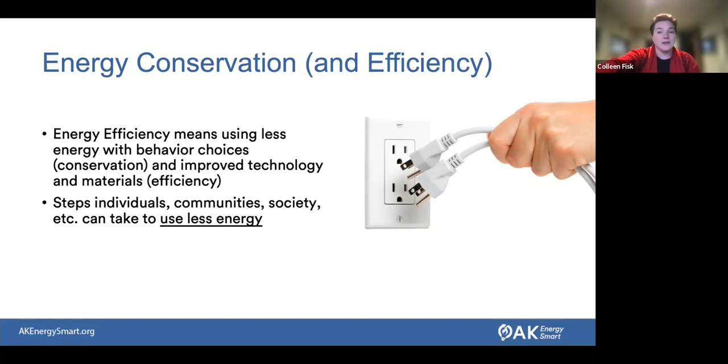And there's a lot of benefits to that, right? We can save money on our utility bills, but we can also save a lot of our resources - we have limited resources. A lot of our electricity comes from natural gas, which is projected by the state to have a shortfall by 2027. So there's a lot of resources that we can use more efficiently and conserve and save. And of course, our lowest carbon fuel is efficiency - anything that we don't have to use is going to be our cheapest and lowest carbon fuel.

Even solar panels and wind turbines and our renewable energy resources - they have much less impact, but they still have some impact from where those materials come from. So any less energy that you can use, the less impact that you're going to have. We are going to focus a lot on what those cost savings are, but I just want to keep that in mind as we're thinking about these things that we can do to save energy.

So one of the things - even if you leave now and head home and say, okay thanks Colleen, that's great, I've heard enough - if nothing else, I want you to check out these energy saving tips resources. This is a booklet published by AHFC and Alaska Energy Authority that has zero cost to expensive upgrades and talks about what those energy saving tips can be.

It's really Alaska specific, and you can download it for free off of our website, which is linked here, or AHFC's website also has it. At the very back of this version of the book, there's an energy assessment checklist. That checklist has a way for you to do a quick assessment of what you know about your house, and a couple of things you can check in your house, giving you a really good starting point for thinking about your energy.

A version of that checklist is also on the AK Energy Smart website. That website has a lot of free lesson plans for teachers to use for K through 12, but it also has a growing amount of adult education resources like this energy assessment checklist that you can use. So if nothing else, I encourage you to check out that energy saving tips book, especially if you have to leave early today, because that's a great resource for understanding what's going on and getting you started on this.

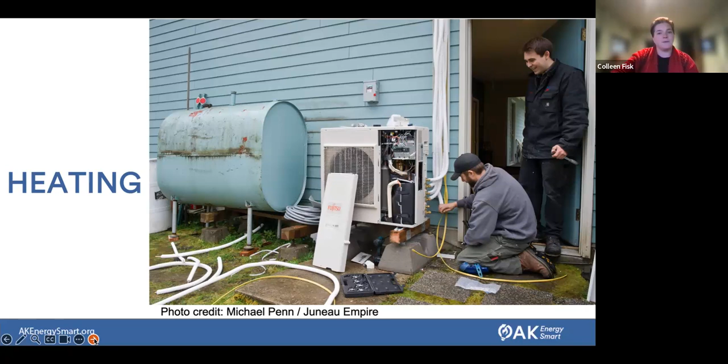So I'm going to jump in. I want to make sure we have time at the end for questions and that we aren't going too crazy here. The first thing is heating. Our biggest energy use as Alaskans is on heating. That is our biggest cost and our biggest resource use.

This AHFC housing needs assessment is from 2018. I haven't seen another one yet, but they have one coming out soon. From 2018, you can see that space heating, no matter what region you are in, is your largest household energy cost by region. So if you're thinking about weatherization and energy savings, this is going to be the biggest bang for your buck. I'm also going to talk about water heating and appliances today, but space heating is by far the biggest impact you can have for saving energy.

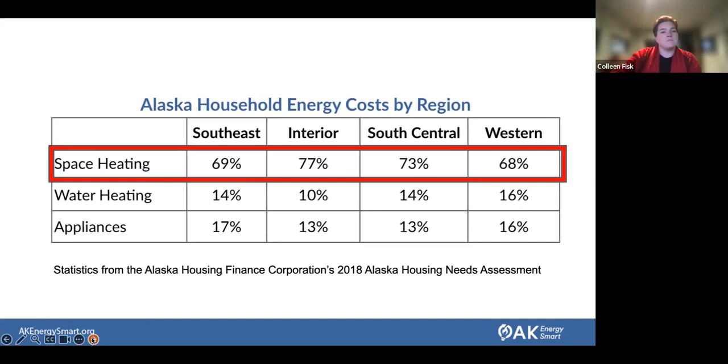So what can you do? You can do some really simple things like checking and unblocking your air vents, radiators, and registers, making sure these aren't blocked, because if you have better airflow, then that heat is going to be able to actually move evenly throughout your house.

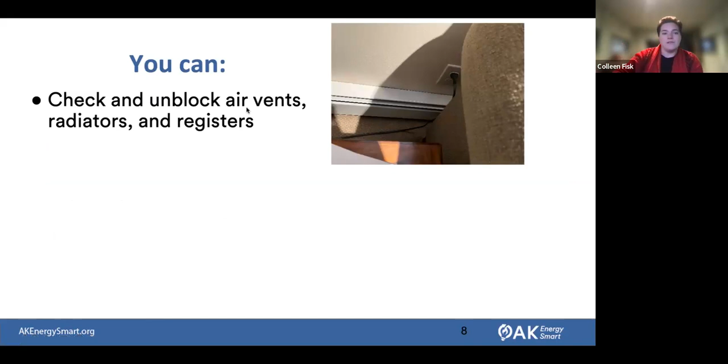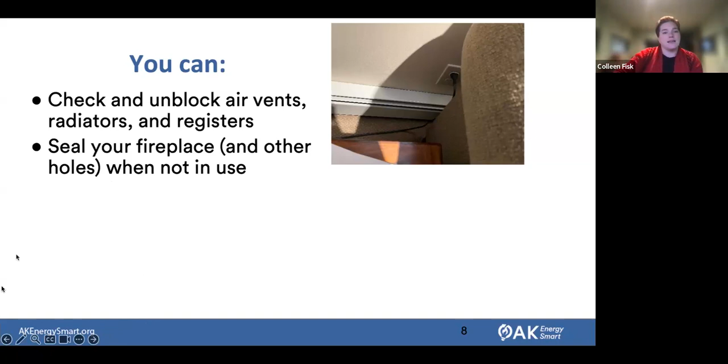You can make sure that your fireplace is sealed, so make sure that flue is shut whenever it's not in use, or block other holes that aren't needed anymore. It's very important, of course, to not block anything that is supposed to be providing ventilation as part of a heating system. That is something that I've heard happens with unfortunate frequency. So don't just block any old hole, but anything that's not being used for proper ventilation, you can consider blocking to see if those are big energy heat loss areas.

It's also really important to have a professional tune your heating system. It's recommended that it's checked every year, and generally systems older than 15 years will have a really big payback by being able to replace them completely. And of course, there are some much more efficient systems, and also things like heat pumps that are coming, where the technology has really improved.

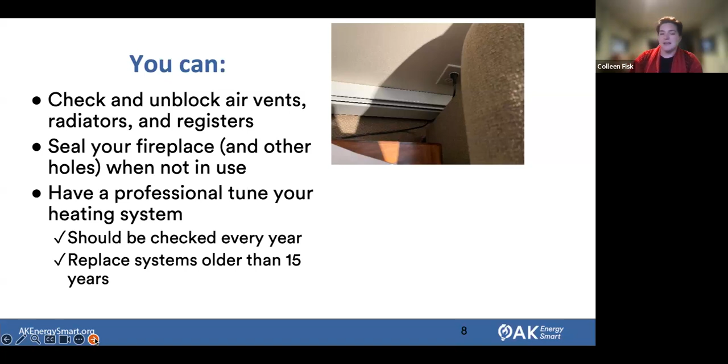So here's a fun photo. Make sure you guys are paying attention. Keep your bunnies off of your vents. I see at least one veterinarian on this call, so you never know what kind of animals are out there.

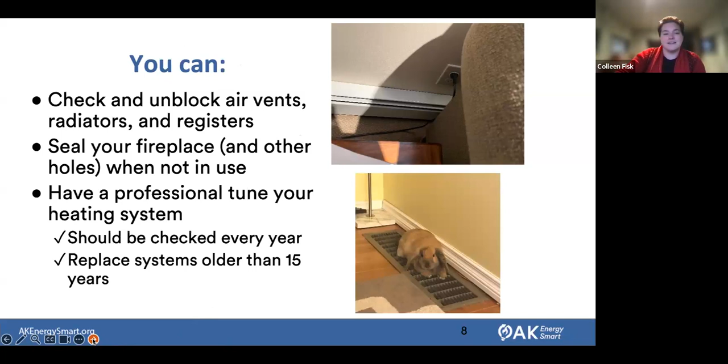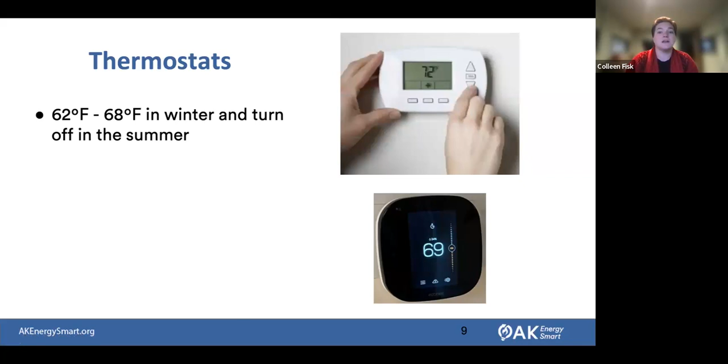Also related to heating, one of the biggest money savers is if you don't already have a programmable thermostat, definitely get one and use it. Have that heat turned down as low as is comfortable for you and those in your house, and have it even lower at night or when you're not at home. Because for every degree that you lower it, you can save 2% on your heating bill. It's a really huge savings by being able to reduce that temperature.

If you have a programmable thermostat, you can set it back 2 hours before bed, so it'll just slowly decrease the temperature, then increase just before you wake. Whenever anybody's not home, use those vacation settings too. If you have a smart thermostat, turning it down when you're going to be gone for a longer period of time can really save a lot of money.

Of course, you want to make sure things are staying safe. Most people don't turn it down below 60 or 55 degrees in the wintertime, so that you can make sure it stays at a temperature where your things aren't going to freeze or cause problems. But whatever is safe and comfortable for you, the more that you can do, the more savings that you're going to have.

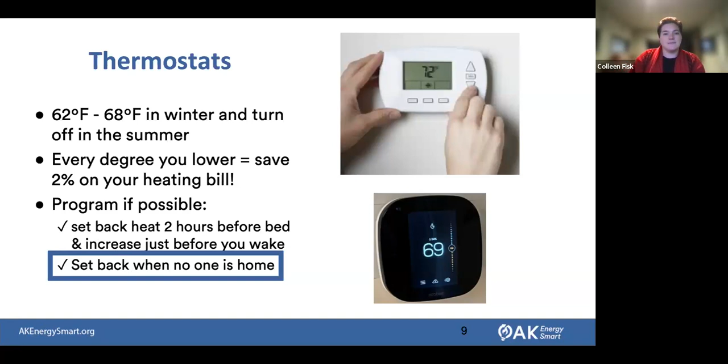So those are the big things on heating. And related to heating is insulation and air sealing.

What's really interesting here is that with the new federal incentives for costs, we currently this year can get up to $1,200 for tax incentives for purchase costs of insulation and air sealing. I'll talk about that a little bit more, but I wanted to get you guys thinking about that, as there are incentives for doing these things as well. So if it costs money to buy things to do the upgrades, there are some tax incentives already available for us to use.

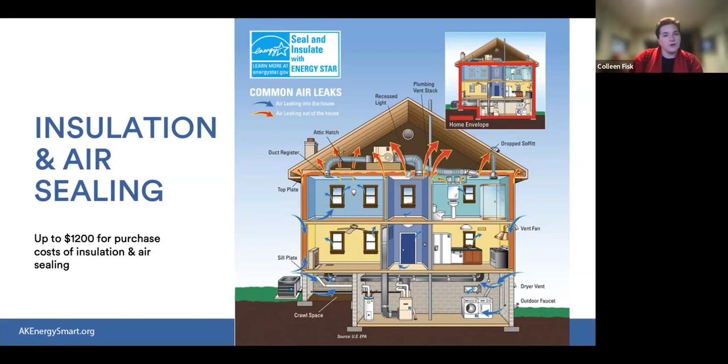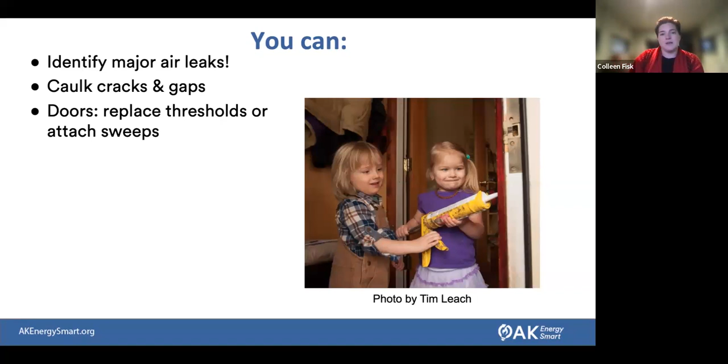When you identify those, you can do things like caulking for those cracks and gaps to be able to save that energy. You can replace thresholds or attach sweeps on doors, or any weather stripping, especially on exterior doors, to improve their energy efficiency.

With windows, a lot of times people think they need to replace them, but you can actually do a lot of repairing and improving the insulation yourself by adding caulking around the window. Unless you have single pane windows in your house, generally it's more cost effective to repair and improve the insulation, or even use things like plastic window coverings you can get at stores to add a little extra layer of efficiency there with windows.

Another tip I heard was to make sure windows are fully closed and latched. I just did this recently - I went around all the windows I normally open in the summertime and relatched them so that it improves the seal on that window and reduces heat loss.

If you do get recommended to do new windows, or if you have single pane windows, there are incentives for up to $600 for new windows, and that's every year. I think it's $300 per window, up to $600. So if you do 2 windows this year and 2 windows next year, you can get $600 twice for those 2 different tax years.

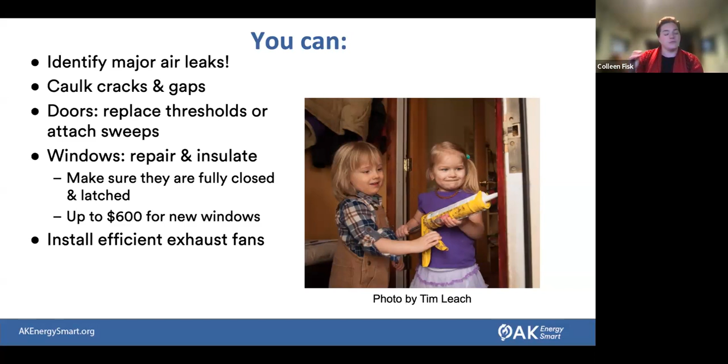There's also efficient exhaust fans. If you're doing a lot of sealing and you don't have good airflow in your house because of that, you want to make sure you're not creating issues for mold. If you're not having enough airflow or other poor air quality, you can install really efficient exhaust fans that you can replace like in your bathroom - just make sure you run them - and they're really quiet and much more efficient than older exhaust fans that are out there.

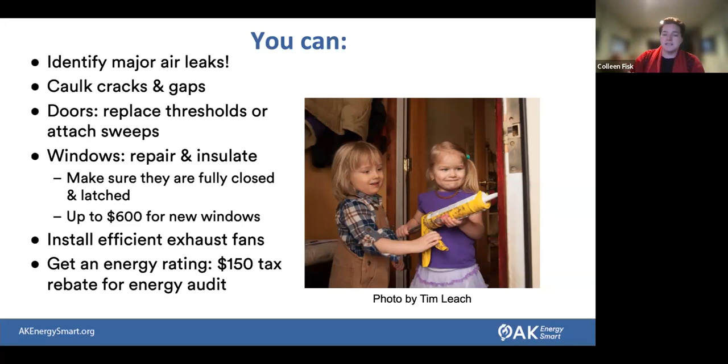The biggest thing is getting an energy rating or audit. Energy audit is kind of the overall term, and there are energy raters that Alaska Housing Finance Corporation certifies. You can get up to $150 tax rebate starting this year for any energy audit that you pay for. That will really give you those specific recommendations for what would save you the most money.

For those energy raters or auditors, they can do things like estimate existing insulation R values, inspect vapor barriers, evaluate attic and foundation insulation, and then provide recommendations for what makes the most sense for your house to save energy. AHFC has this rater list to be able to look at that, and again, you get that $150 back.

I don't know what the going rate is. I heard one person guess at $500 for the current rate for an energy audit, so it's not cheap. However, if that's something you can do and you get that $150 back, it is a very helpful tool because they can give you that recommendation.

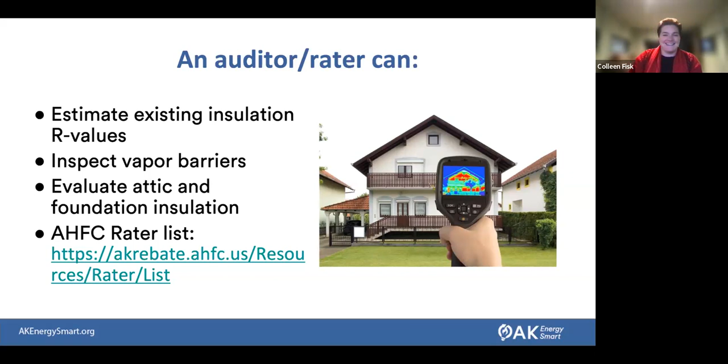All right, so for hot water, your domestic hot water, there's a few things you can do to save energy. We have our heating as our number one - we've talked about heating systems and insulation and air sealing. But now our next big energy cost in our homes is hot water.

So again, turn down the heat. In this case, it's really important to make sure the temperature is staying safe. You do not want to go below 120 degrees Fahrenheit, but often hot water heaters are set to a higher setting than they need to be, like that 140 degree mark. Turning it down to 120 can save 6 to 10% on your energy bill.

You can also check to make sure your water is staying at 120 degrees by running your faucet for a couple minutes and using a thermometer to see, okay, it's actually staying at 120 degrees. So if you're concerned about that, you can check it that way. It can be another big energy saver related to heating.

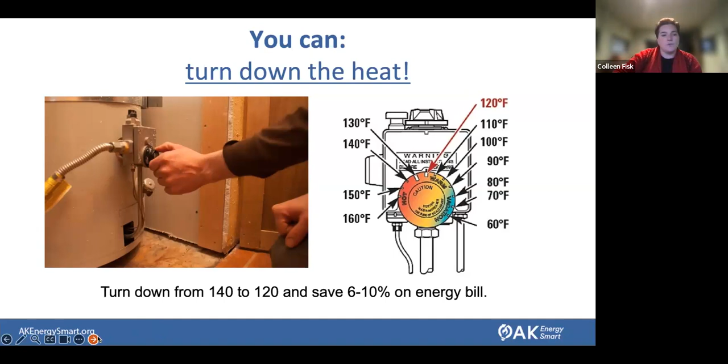And other things you can do related to water is, of course, don't let the water run, especially if it's warm water. Fixing leaky faucets and running toilets - these are things I like, when I bought my house I had to learn how to fix a running toilet, and it was easier than I thought. YouTube is a wonderful thing to be able to teach you things, right?

And doing things like low flow shower heads and having aerators on faucets can really help you save.

And if it's recommended by the manufacturer, some of the older water heaters, you can even add a blanket to them for insulation. If they weren't built with really good insulation in mind, you can add a blanket. But again, you have to check to make sure that it makes sense or is appropriate for your specific water heater.

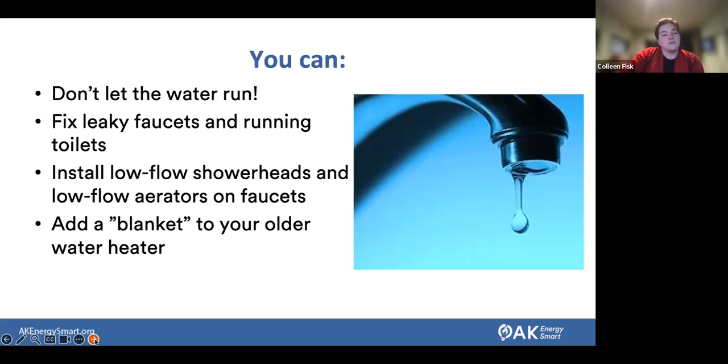And then a really big cost, if you want to think about this, is if you have a really old system, getting a newer efficient one - so getting an upgrade for it.

A lot of times systems are oversized for what you need, especially as things become more efficient, like dishwashers and clothes washers, and having those low flow faucets - then you don't generally need as much water as you first thought, or as the house first demanded when it was built. So you could also consider a smaller size water heater that might make more sense for your house.

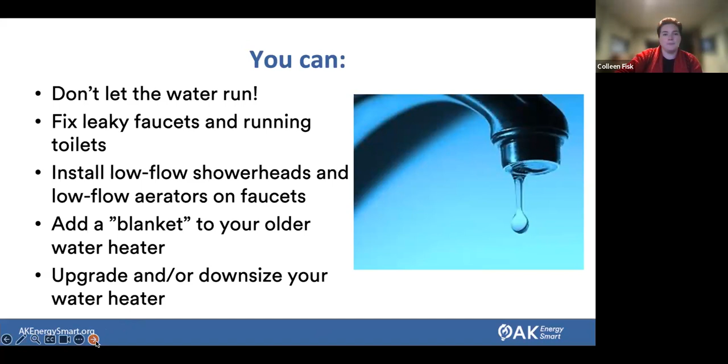Okay, so that was water heating. Electricity we're going to dive into now. And electricity, one of the biggest ones is lighting.

Some of the things we can think about are really easy: turn off lights when not in use, switch to LEDs - these are probably things many of you have already done or thought about. But there's also Energy Star fixtures and lamps. So if you're replacing things or putting new things in, the actual lamps themselves can also affect how much electricity those bulbs are using.

And then using timers, and if you're in an appropriate situation, maybe even occupancy sensors. I go into a lot of schools, so a lot of occupancy sensors in classrooms, which is nice so that teachers or students don't have to always remember to turn those off, but they come on and off automatically.

I'll talk a little bit more about timers in a second. But you can also group and plug things into a power strip. It's October, start thinking about those vampires you might see around this time of year - there is such a thing called vampire or phantom loads. Those are things that are using electricity when they are off, or when you think they're off and you're not using them for anything, but they're still drawing some electricity. A really small example would be like the clock on a microwave.

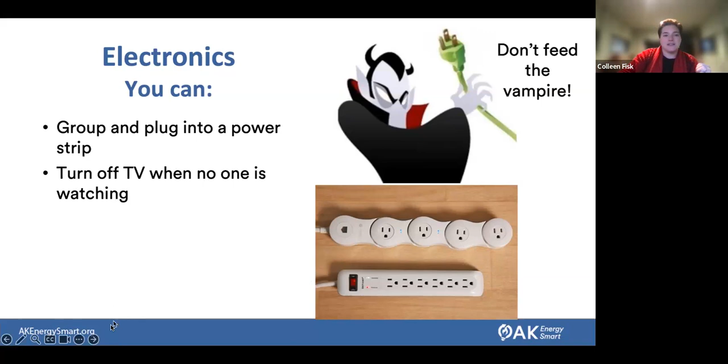One culprit that used to be really bad was things like cable boxes. I think a lot fewer people have cable boxes now, but that's an example of something that could be drawing a lot of electricity. So turn off stuff when you're not using it, use sleep modes, take advantage of that technology that's already there. Some power adapters and chargers, if they're getting warm but nothing's being charged, then you know that's electricity being drawn and wasted.

You can do things like power strips, or smart strips if you have a bunch of stuff dependent on something, for example everything else is only on when the TV is on, so the other stuff isn't drawing electricity. I have a little power strip in my office that I hit off, so my printer and monitor and everything goes off when I'm not here to save that electricity use.

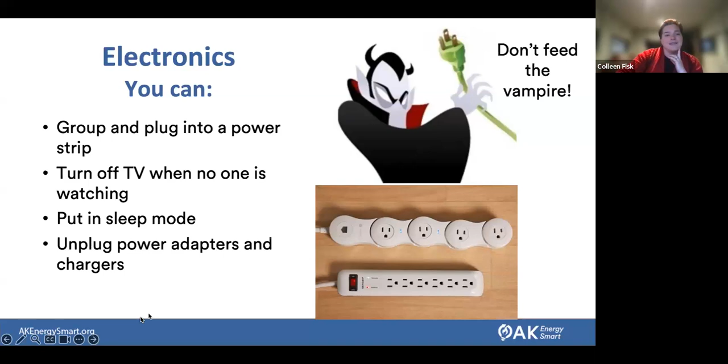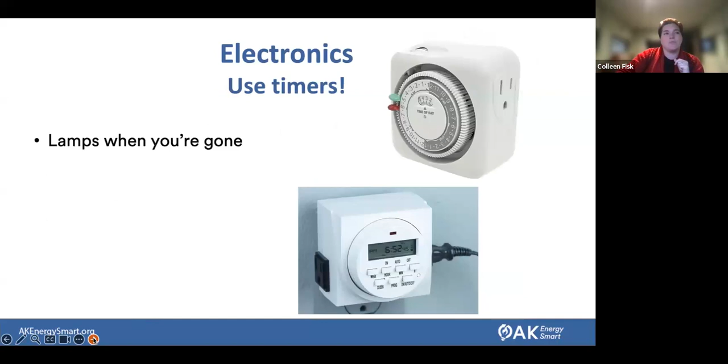Timers are really handy for several different things. One of the first ways I was introduced to timers was when I was house sitting in high school - you'd set it on a timer so the lamps came on and off at automatic times, even if nobody was there.

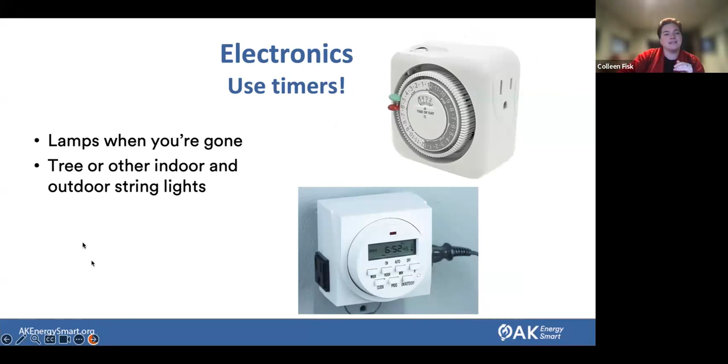There's some really useful things to do with this. We use it now for our holiday lights, those indoor outdoor string lights, to reduce light pollution in the middle of the night but still have lovely lights in the morning and evening when it's dark out in our winter.

If you use heat tape for anything, you can also put those on timers, maybe just during the coldest overnight times. Set yourself a reminder to make sure to unplug the heat tapes in the springtime - it's really important. For block heaters, it's recommended to have those plugged in about 2 hours before you leave. So instead of having the block heater running all night, use a timer to make sure it's only coming on at say 6 a.m. if you're leaving at 8 a.m. Really handy that way.

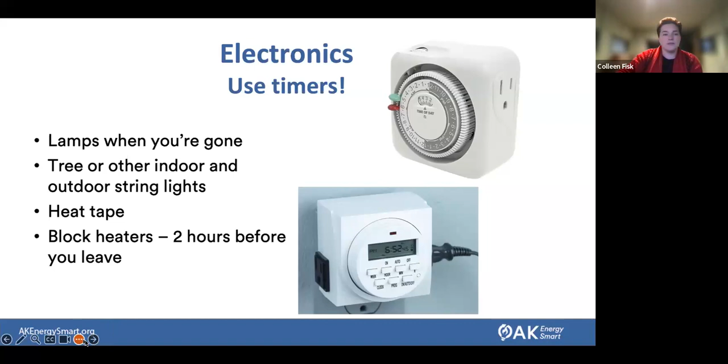With electronics, there's also Energy Star appliances - I think a lot of us have seen those. It's a lot less water use to use your dishwasher than to hand wash because it's just so much more efficient, they can really recycle that water use. Also clean out the lint from your dryers.

Check the temperature of your fridge and freezer. The fridge can be between 36 and 38 degrees Fahrenheit, and the freezer can be 0 to 5 degrees Fahrenheit. Any colder than that, you could maybe turn up the temperature a little bit, and you can get fridge freezer thermometers to check it. One interesting thing is you can check for leaks in the door seal - put a piece of paper and close the door on it, and see if it comes out easily, then your door seal maybe isn't that great, so you could look into replacing it.

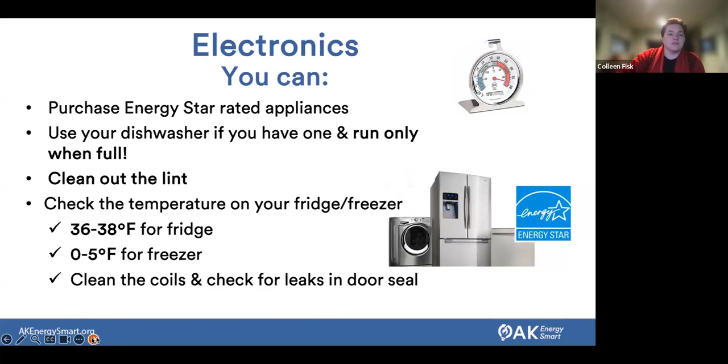You can look up the wattage of different appliances, or there are electricity monitors you can use to measure electricity. Some things have it labeled on them, like light bulbs showing how many watts they use. But this is a good way to figure out, okay, maybe this thing uses a lot of electricity, but I don't use it that often, so it doesn't cost me that much. It can really help you identify what's going to save you the most energy and money.

So to wrap up those efficiency and weatherization tips: conservation or behavior change is free, right? That's maybe not always easy, but it is free. Some efficiency improvements, like improved technology or materials, may cost you money up front, but will save you in the long run. And some measures are relatively low cost and do-it-yourself. I'm going to talk here in a bit more about some of the incentives that have come through from the Inflation Reduction Act as well.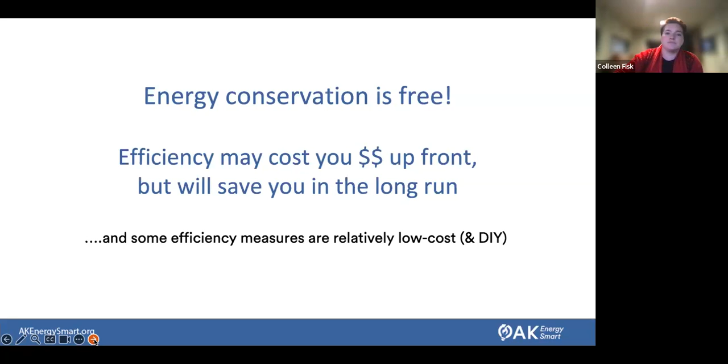What I also want to mention is that it's really helpful to measure, or at least track, your energy use. I mentioned that already with the electricity use calculator. But if you're getting your electricity from a utility, unless you're off grid, it's really nice to be able to track that. It shows your electricity use over time, over a year.

So you can say, oh, why is it so—that's weird, that's way higher than it was this time last year, right? You can check things like that, making sure things aren't going higher than what you expect for the number of kilowatt hours you're using. A lot of us probably get our heat from ENSTAR as well—maybe not, at least here in the core Mat-Su area.

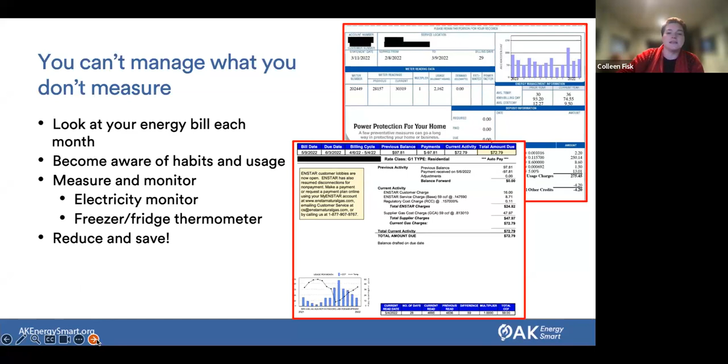These are things you can do: becoming aware of your habits and usage, using an electricity monitor, fridge and freezer thermometers can really help you identify those things. You can really save a lot of money on your bills if you're keeping track, paying attention, and making those small changes.

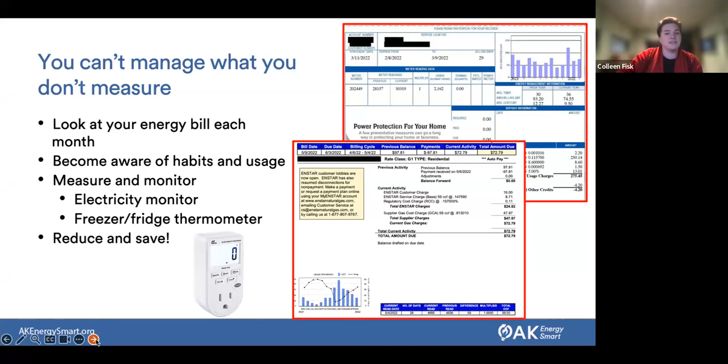But you can also make some really bigger changes, and there are some federal incentives for that. Oh yeah, there's an example of an electricity monitor. So the Inflation Reduction Act that was passed last year at the federal level has a lot in it.

I'm not going to pretend to be an expert on this. I tried to pick out some things that were really specific to efficiency and weatherization. There are kind of two main ways we can think about these incentives coming from the Inflation Reduction Act: there are point of sale rebates.

So if you go to SBS or Home Depot or Ace or wherever, and you're going to buy a new appliance or weatherization materials, like a new well-insulated door, there will be rebates when you buy it—so you don't have to pay as much up front. Those aren't available yet; the federal guidelines were just released this summer, and it's going to be administered state by state, so states still have to develop those. Alaska Housing Finance Corporation is going to be the one working on developing these, but they're not available yet, and the earliest they'll be available is next year, so we still have a ways to go before that happens.

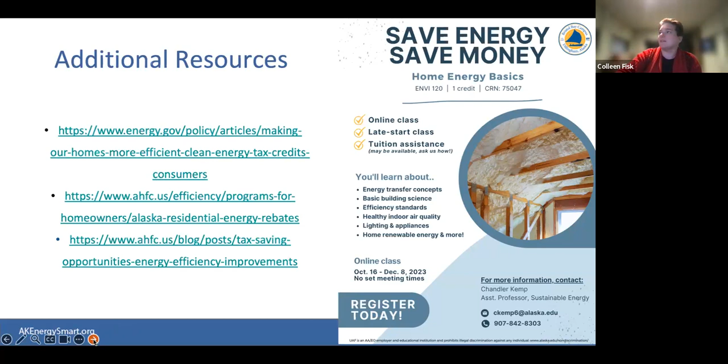So that's another cool one to learn about and to check out if you want to learn a lot more about this stuff.

So kind of some main points here. You do not have to be an expert to start saving energy. I started at REAP—I was hired because I had an education background and could teach stuff. I did not have an energy background, but I learned, and you can also learn and keep learning. You don't have to be an expert to start, and there's a lot of things you can do at little to no cost. There's tax incentives already available now for more efficiency and weatherization.

I really hope you keep spreading the word. I know there weren't a ton of people here on the webinar tonight, but I hope you can share this with others, maybe share the recording with others so that we can keep sharing these resources, and maybe something will spark with somebody that can really make a big difference.